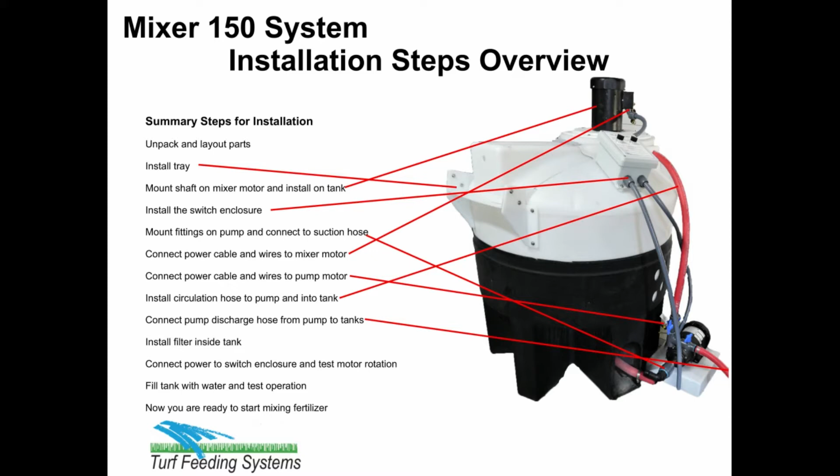Install the tray and use the stainless steel fasteners that are included. Tighten all bolts very tight and well. Install the mixer shaft on the motor and tighten with Allen wrench tight. Install the mixer shaft in the tank and the bushing at the tank bottom. Line up the mixer base with mark and install all the mounting bolts in the flange and tighten well.

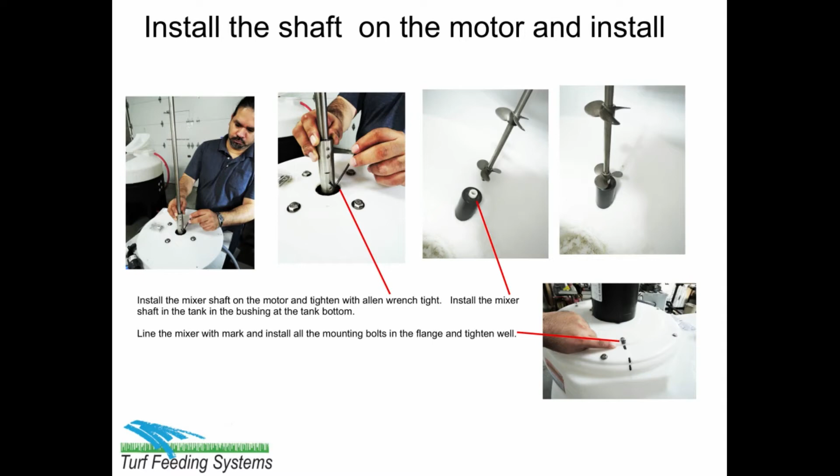Mount the switch enclosure on the tank with the stainless steel fasteners, and tighten well. Mount the fittings on the pump using the thread sealer and thread on, but do not over-tighten, it will crack the fitting. Put thread sealer on the pump suction fitting and slide the hose in the hose fitting and attach the hose clamp to secure the hose. The pump fittings should be installed like this. The discharge line hose should point out to the tanks.

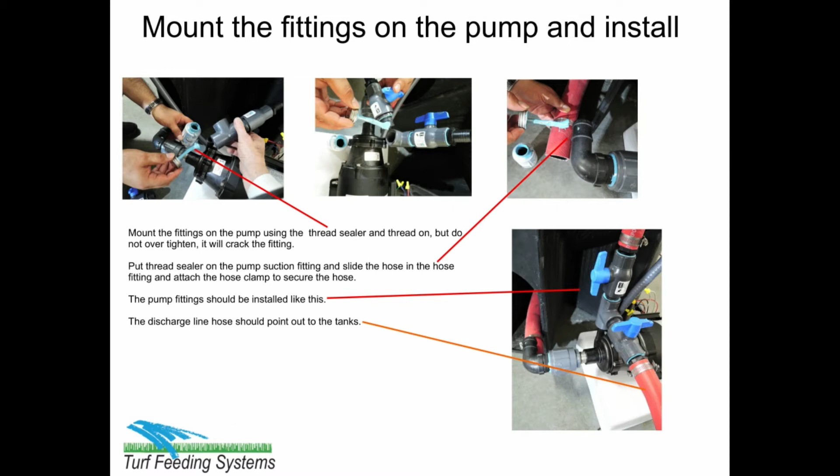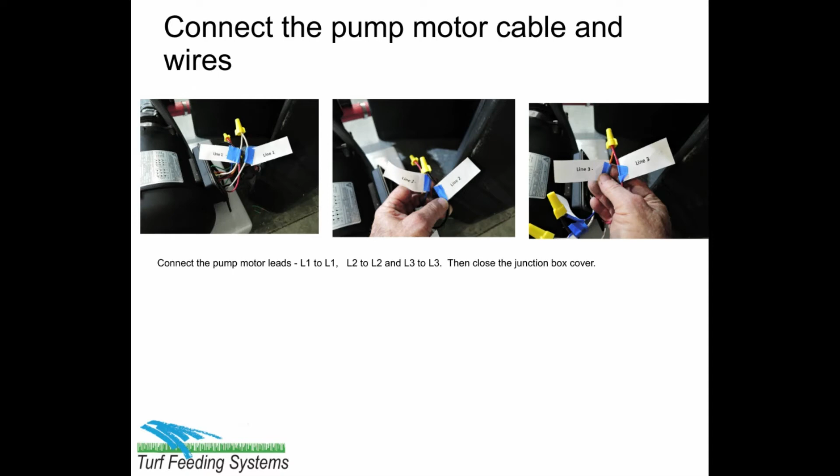Connect the motor leads, L1 to L1, L2 to L2, and L3 to L3. Then close the junction box cover. Connect the pump motor leads, L1 to L1, L2 to L2, and L3 to L3. Then close the junction box cover. Install the circulation hose to the pump discharge fitting, top connection, and run it into the tank opening.

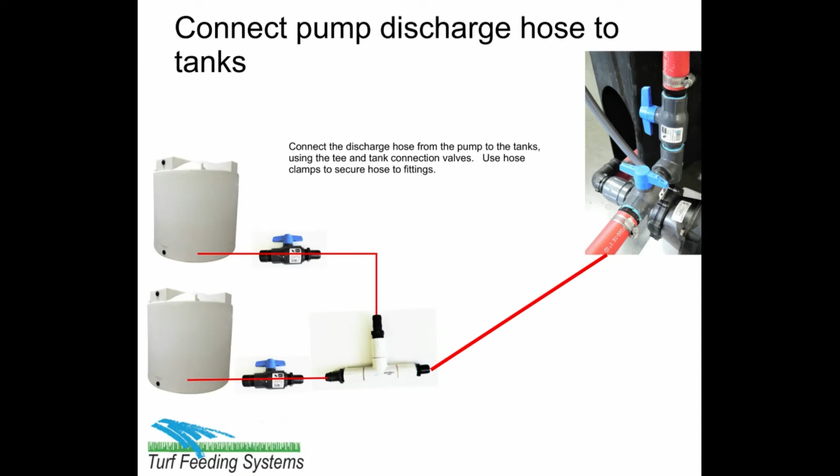Connect the discharge hose from the pump to the tanks, using the tee and tank connection valves. Use hose clamps to secure hose to fittings. Install the filter inside the tank. Screw it in the tank fitting at bottom only 3 turns. Not tight. This filter must be installed always to mix. The filter is important to prevent rocks or stones that are in fertilizer from damaging the pump.

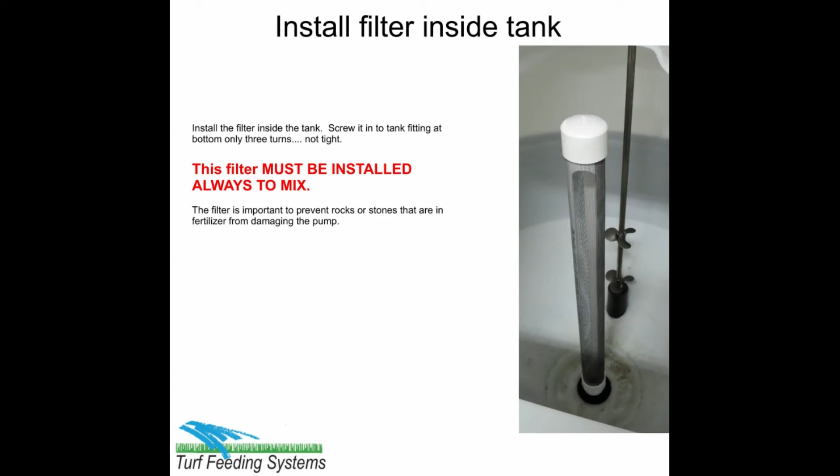Connect the power to the switch enclosure and check the motor rotation of the mixer and the pump. If the mixer motor turns the wrong direction, you need to switch any 2 power leads of the main power you just connected. Change L1 and L2 and then check the direction of rotation. Do this on the mixer first. Then just check the pump motor direction, which should match.

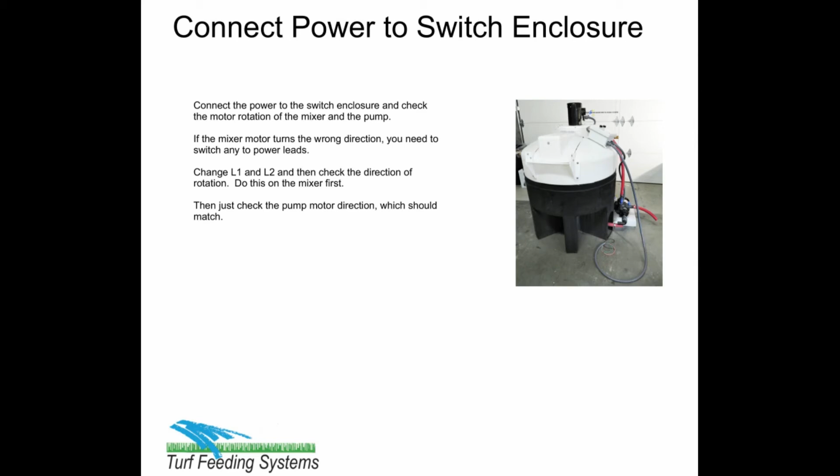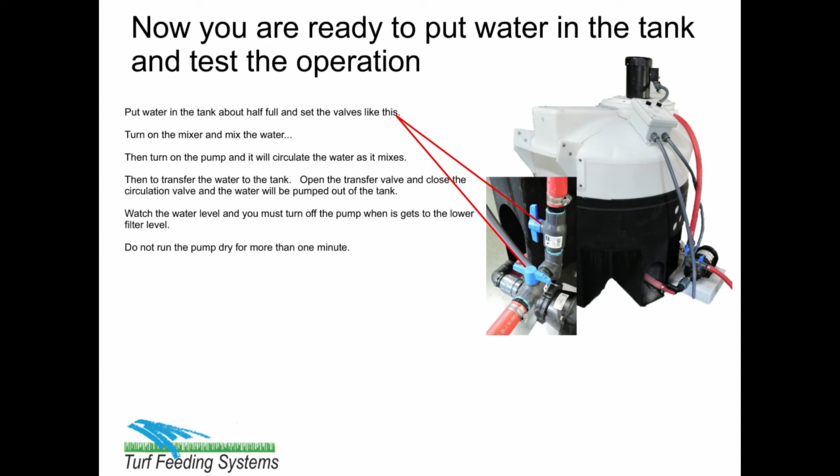Here is how to mix urea 4600. Put 100 gallons of water in the tank and turn on the mixer and the circulation pump. Close the transfer valve on the pump and open the circulation valve. The water will be mixing. Next add 3 50 kilo bags of urea one at a time. Let it mix for several minutes before adding the next bag. Then let it mix for at least 10 minutes. The water will get very cold as the urea mixes and dissolves.

Then transfer the mixture to the tank. Open the tank valve you want to pump the mixture to and open the transfer valve on the pump, and close the circulation valve on top of the pump. This will transfer the fertilizer to the tank. Watch the level of mixed fertilizer in the tank go down as it pumps. When the level gets to the bottom of the filter, close the transfer valve and immediately turn off the pump.

Now you are ready to start another mixture in the tank. Follow the same steps. If there is still unmixed fertilizer in the tank, just add more water to the tank and mix it and then pump it to the tank. The urea fertilizer mixture is a 1600 mixture. You can mix other fertilizers, but you must first test mix it in a jar to make sure it will totally dissolve. Only use fertilizer you have test mixed before you use it in the mixer.